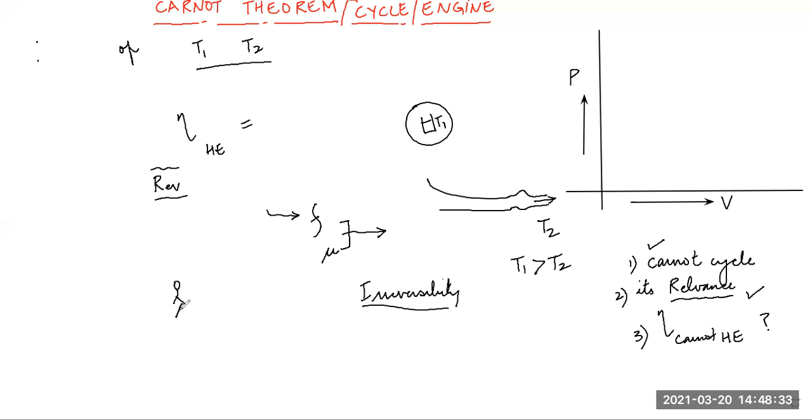It means simply, you're here and you're walking till here, and then you're walking back, right? If this is a system, everything associated with you and your surroundings, when you walk from here to here, there are changes in your heartbeat, in your temperature, in the heat released to atmosphere. When you walk back, your initial and final conditions should exactly match. If they match, then the process is reversible.

And actually speaking, I don't think there's any 100% reversible process in this world because of the dissipative factors, the waste, the losses. So all the processes are actually irreversible, but Carnot wanted to create a cycle as a benchmark for all the cycles of our present automobiles. So he obviously wanted to give maximum efficiency for this Carnot cycle.

And even till date today, technology has advanced so much, but still even today, if we want to create a bike, if we want to produce a bike, we again compare the efficiency of that bike with the Carnot heat engine only, because the Carnot heat engine gives us the maximum efficiency of a heat engine operating between two temperatures T1 and T2. What is T1?

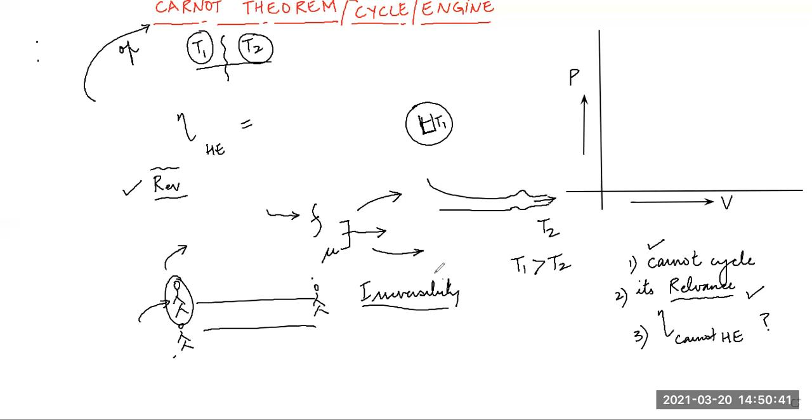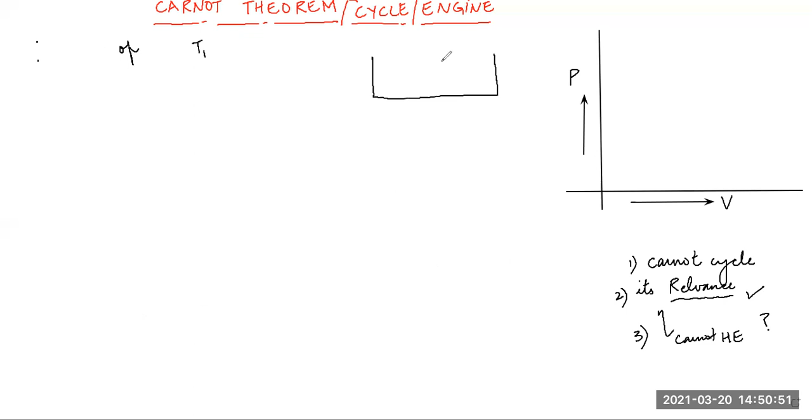What Carnot thought is basically, T1 is the temperature of the hot reservoir from where we would want to take out heat. How much? Q1. Supply that heat to our cyclic Carnot heat engine. This is the Carnot heat engine. I put these arrows to show that they are cyclic.

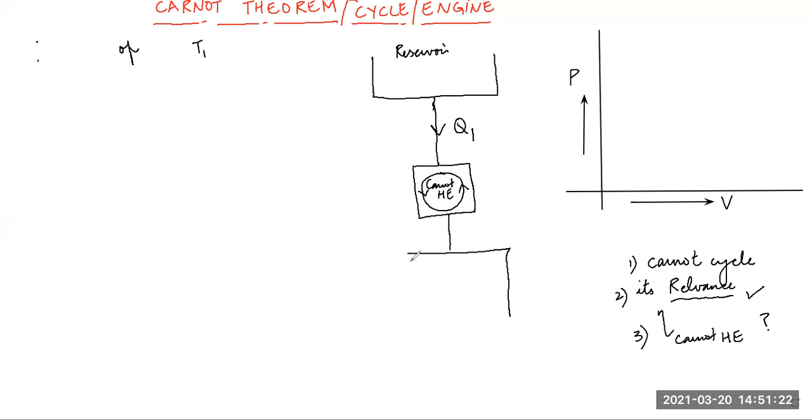And then Sadi Carnot became famous, and he was really logical because he talked about this thing. This is very, very important. People previous to Carnot were actually trying to convert all the available heat into work done, and that was a big mistake. So that means we have already proven that the first law of thermodynamics has some flaws. Right word, it's not wrong. So we always wanted some other law which would cover up those flaws. So that flaw was well taken care of by this.

Carnot postulated that when Q1 heat is taken from a reservoir, well, a reservoir is an infinite source of energy. So if its temperature is T1, no matter how much heat you take from the reservoir, its temperature is not going to go down. Very good. And here also you have a cold reservoir at, let's say, T2. So the temperature is not going to increase no matter how much heat you give to it. In other words, we also say this is the heat sink and this is the heat source. In case of a heat engine, these are the terms: source and sink.

All right. So guys, what I told you is that this is what Carnot thought: that there's a reservoir at temperature T1. Q1 is taken from T1 to do the work. Q2 is dissipated to the cold reservoir at temperature T2. And this part was really very, very important, which actually paved the way for a very important law of thermodynamics. That was the second law of thermodynamics.

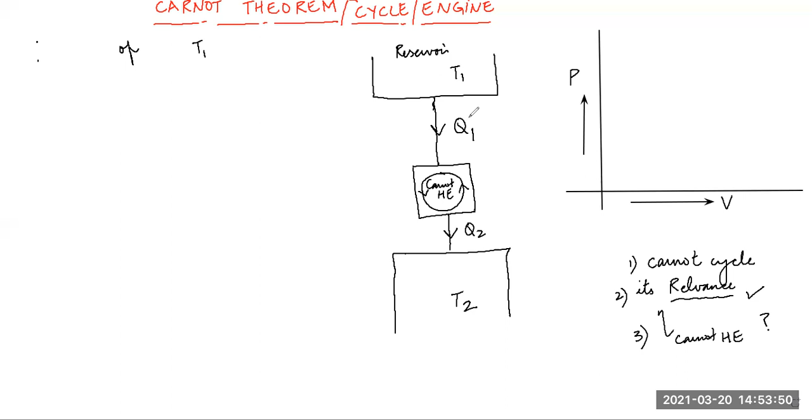And now, because Q1 is taken and Q2 is wasted to the atmosphere, it is possible, Carnot postulated, that you can get some work out of a theoretical heat engine which is working in a cycle. Is it right? All right. So, guys, now he also thought that all the processes are reversible, because only when we assume that the processes are reversible, then the losses are not there and the efficiency will be maximum.

All right. Now, what is the first process? You see, in this process, heat is taken from the reservoir. How can I represent it on PV? Not me. How did Carnot represent this on the PV diagram? So, guys, here the knowledge of isotherms and adiabatics is important to you. Well, isotherms: we know that this is an infinite source of energy. The heat is taken at constant temperature. So this is the way I draw isotherms on my PV diagram.

All right. So this is the isotherm, and this is the second isotherm. These are two isotherms. Okay. Now I'm going to talk about the first process. The first process is, the state of the system was at one. From one, the system went to state two, isothermally.

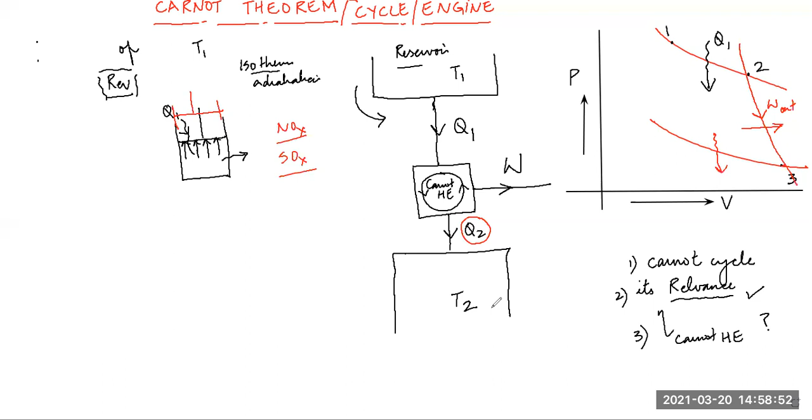And Carnot thought that is also rejected isothermally. Why? Because this is also a reservoir, a cold reservoir, and no matter how much heat you give it, the temperature remains constant. How much is the temperature? T2. Okay, so why does the temperature drop? At point 1, the thermodynamic variables of the system are P1, V1 and T1. At point 2, they are P2, V2, and not T2, it's T1, because it's isothermal heat addition. So the temperature remains the same.

Now here, can you tell what the thermodynamic variables are? P3, pressure further comes down, then V3, and it's not T1. Now the system has done the work. Whatever was the internal energy of the system has gone down because it has done some work. So the temperature has dropped; here we will take T2.

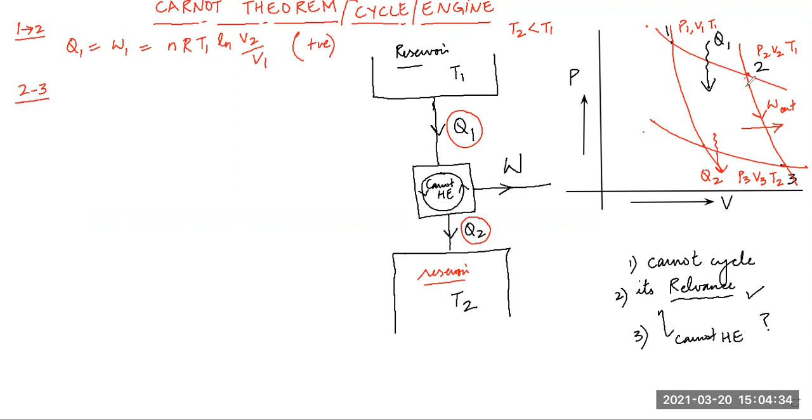Then the process is 2 to 3. What is this process? 2 to 3 is adiabatic expansion. The volume has increased from V2. See, this volume is V2 and this volume is V3. V3 is more than V2. So 2 to 3 is adiabatic expansion. So work done in adiabatic expansion, W out. W out would be, can you tell me, students? W out is basically

P2 V2. Whenever you want to find out the work done in an adiabatic process, put the thermodynamic variables of initial, and then subtract the final thermodynamic variables P3 V3. The work done will be positive. Remember that in adiabatic process, initial minus final, P2 V2 minus P3 V3 divided by gamma minus 1. This is equal to nR

Perfectly. So P2 V2 is related to this, where the temperature is T1. So it will be T1 minus T2. Correct. At point 3, the temperature is T2. Temperature has fallen from T1 to T2. Okay. And T1 minus T2 divided by gamma minus 1. Beautiful. Now the process is 3 to 4.

Can you tell what is this process 3 to 4? Isothermal heat rejection. First, isothermally we added the heat, and here isothermally the heat is rejected to the atmosphere. This is the most important point which compelled people to think that if you want to have some work done from a heat engine, you need to reject some heat to the atmosphere, the sink. So in 3 to 4, isothermal heat rejection, we have Q2.

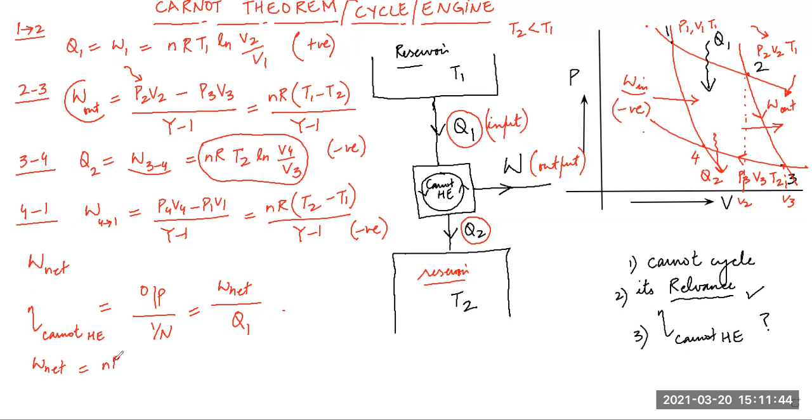Okay. So if you want to find out the W net, just add all these. We know V4 by V3 would be negative, 3 to 4 would be negative, correct, and this 4 to 1 is also negative. So we just add all this. It would be nRT1 ln V2 by V1, plus nR(T1 minus T2) divided by gamma minus 1, plus nRT2 ln V4 by V3, plus nR(T2 minus T1) divided by gamma minus 1. See the beautiful thing, students.

If you see these expressions, this expression is T1 minus T2. This expression is T2 minus T1. So they would cancel with each other. Beautiful. These are opposite to each other, 2 to 3 and here, so they will cancel. When they cancel, what you get exactly is nRT1 ln V2 by V1 plus nRT2 ln V4 by V3. This is our net work done. All right. Okay, we have done this.

And now we will find out the efficiency of Carnot heat engine. All the processes are reversible. There is no friction. There are no dissipative forces, no viscosity. The working fluid is ideal. Everything is the best we are imagining. So, what is the efficiency of Carnot heat engine?

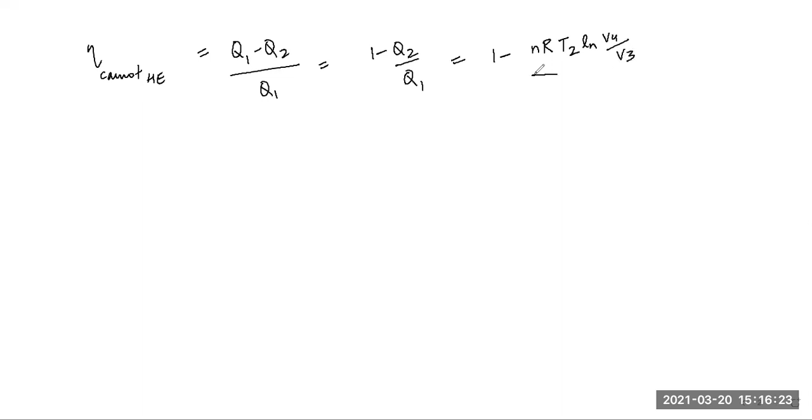So this is equal to 1 minus what? Come on, students. nRT2 into ln of V4 by V3, divided by nRT1 ln V2 by V1. Is it right? Is it V2 by V1? Just see. So this is V2 by V1. Perfectly right.

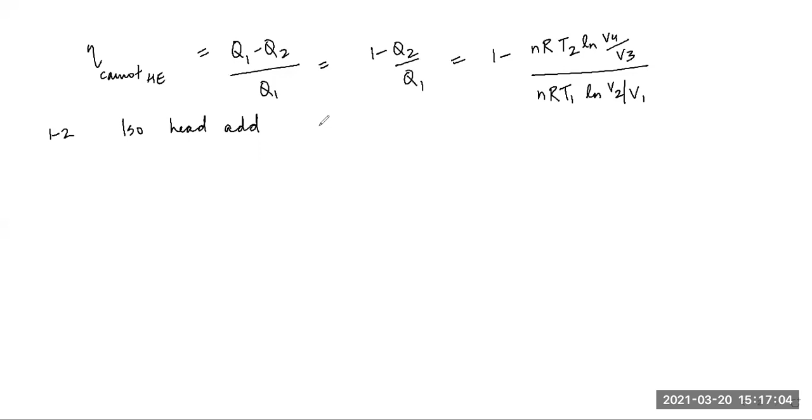V2 by V1. Is it right, guys? Beautiful. And students, here we know that the 1 to 2 process was isothermal heat addition. Remember, 1 to 2 process is isothermal heat addition. All right. So, what is the law which will be prevalent? PV is constant, so P1 V1 would be equal to P2 V2. Very right. 2 to 3 is adiabatic expansion. Beautiful. So, what is the law prevalent there?

Here it would be PV raised to power gamma is equal to constant. So we can say P2 V2 raised to power gamma is equal to P3 V3 raised to power gamma. Beautiful. What about the 3 to 4 process? It is isothermal heat rejection to the sink. Beautiful. So what will be the law prevailing there? P3 V3 would be equal to P4 V4.

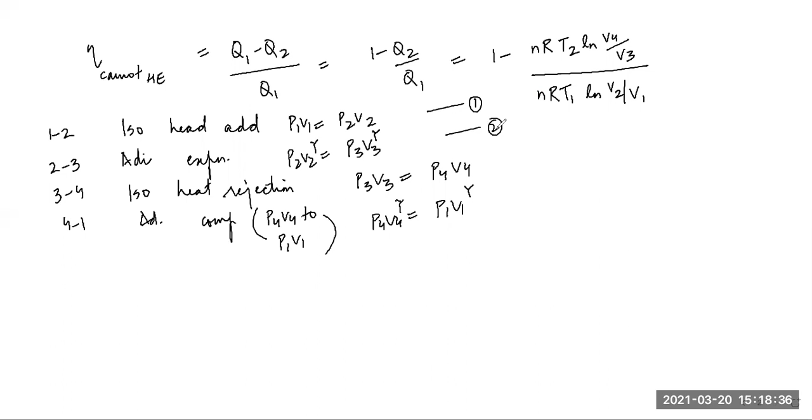In the 4 to 1 process, adiabatic compression from P4 V4 to P1 V1. Beautiful. Or you can say temperature T2 to T1. Very right. So it will be P4 V4 raised to power gamma is equal to P1 V1 raised to power gamma. Beautiful. That's great. What do you do, students? This is your first equation, second, third, fourth. Multiply all equations. What do you get?

Here you get, students, one second, let me change the color. Here you get what? Please come on, help me. We will have to do that. P2 V2 raised to power gamma minus 1 into P4 V4 raised to power gamma minus 1 is equal to P3 V3 raised to power gamma minus 1 into P1 V1 raised to power gamma minus 1. Correct, very right.

You have given very right justification, because everything will divide. It will be P1 V1 into P2 V2 raised to power gamma into P3 V3. This is how we multiply equations. Keep speaking, Gurjot Singh. P4 V4 raised to power gamma is equal to P2 V2 into P3 V3 raised to power gamma into P4 V4 into P1 V1 raised to power gamma. Is it right? Now, see, do one thing.

Here P1, P2, P3, P4 will cancel. Is it right? One, two, three, four. They cancel. What do you get? Here you get V2 raised to gamma. See, here also V2 is there. Bring V2 on this side. It will become gamma minus 1.

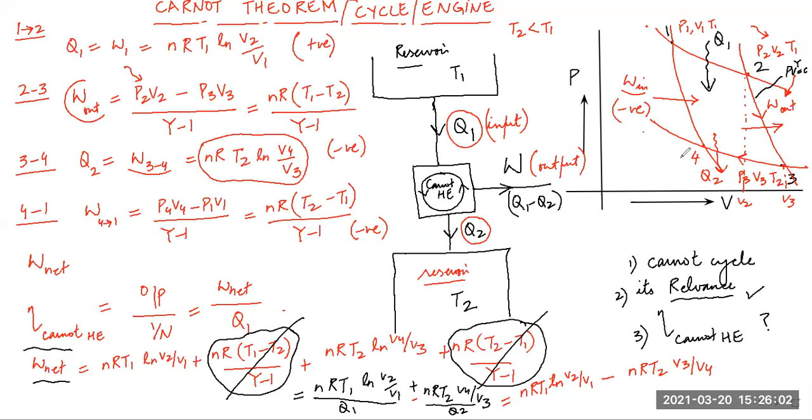All the processes we have assumed as reversible, but when you talk about an actual automobile, all the processes will not be reversible, right? So efficiency would automatically be less than Carnot theoretical. But one thing Carnot has proven, that efficiency cannot be 100%. When we studied the first law of thermodynamics, the first law was okay with the 100% efficiency concept.

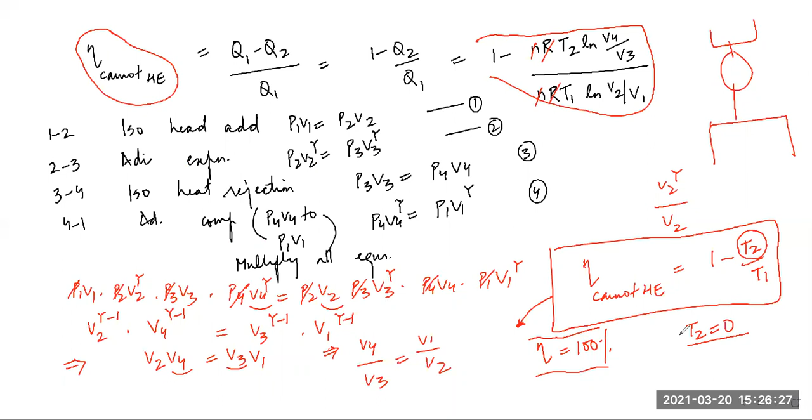Why? Carnot theorem, Carnot cycle took the seat of heart in thermodynamics, because it told that the maximum possible efficiency a Carnot heat engine can have is 1 minus T2 by T1. What does that mean? Let us say, huh?

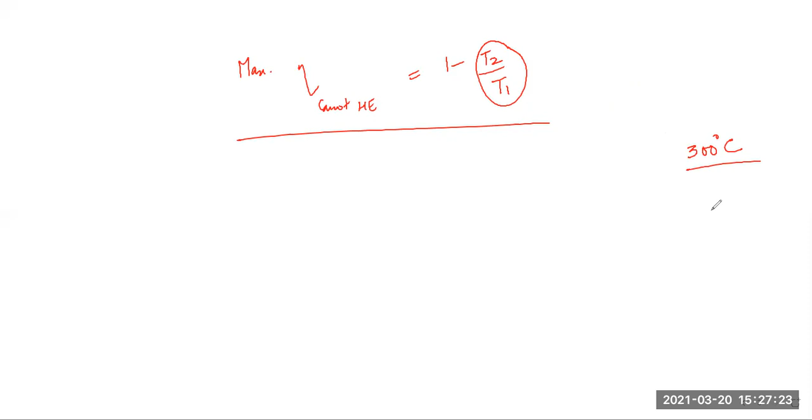And now a very important thing comes. What is that? Let us say there is a theoretical Carnot cycle. It is operating between, let's say, source temperature 300 degrees centigrade. The sink temperature is normal atmospheric temperature. Normal atmosphere is a sink, and let's say we talk about Punjab, that is 40 degrees centigrade. Now can you calculate its Carnot efficiency?

Its Carnot efficiency will be 1 minus, this is my T2 and this is my T1, so it will be 40 upon 300. It will be 100% wrong. Never take temperature in degree centigrade. If you calculate 1 minus 40 by 300, it will be a wrong answer. You do 40 plus 273 divided by 300 plus 273, that is 573. Remember here, 273 is not getting cancelled.

It's not subtraction. So this is something like maybe 310 approximately. Imagine this is 600. So this is 0.5, so it is 50% efficiency. Now, when they design an engine, they know this is a piston and cylinder of an engine, and here T1 will be approximately this much. If it is a diesel engine, it will be a little more. If it is a petrol engine, it will be this.

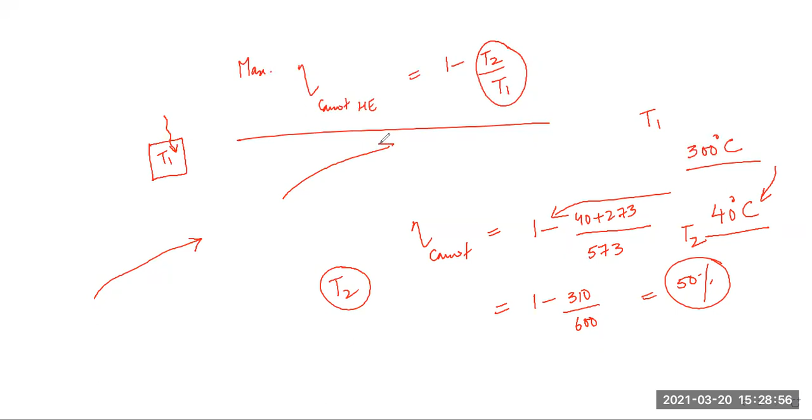And atmosphere is T2. So when they want to compare the efficiency of their engine, they will always compare with Carnot efficiency, which will be simply 1 minus T2 by T1. So that efficiency will come to be, let's say, 70% or 72%. So when they actually calculate the efficiency and compare with Carnot efficiency, they will understand how much betterment they have done to that engine.

So Carnot heat engine is a kind of benchmark, the maximum possible theoretical efficiency which any heat engine can achieve. But the important thing is working between T1 and T2. The question "What is the efficiency of your heat engine?" will not have any relevance. You have to specify the temperature range it is working in between. Is it right?